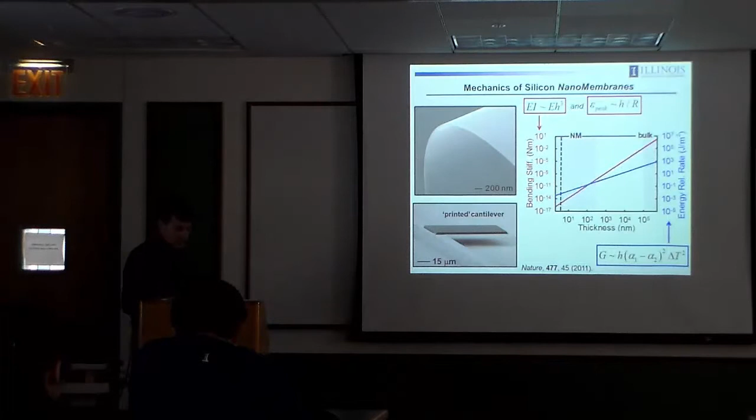So if you think about this format of material, it has the properties that I just mentioned. It's very planar, flat. It's rigid and brittle. If you drop it on the ground, it'll shatter into a million pieces. If you try to wrap it around a body part, it will crack. And that's partly because of the intrinsic materials properties, but it's also a consequence of the fact that the wafers are pretty thick. So maybe a ½ millimeter thick or a millimeter thick, depending on the diameter. And that renders a relatively large bending stiffness.

So the bending stiffness scales like the product of the modulus of the material. That's sort of intrinsic. You're not going to change that. But it also depends on the cube of the thickness. So if you plot the bending stiffness as a function of thickness, you see that you have a value for silicon that's around 10 Newton meters for a wafer scale thickness, so maybe a millimeter.

But because of that cubic scaling, this is sort of a log-log plot, the bending stiffness decreases by many orders of magnitude as you reduce the thickness from a millimeter to, say, 10 or 100 nanometers. And so in this regime, the bending stiffness is maybe 10 femtonewton meters, and that's 15 orders of magnitude decrease in bending stiffness just through geometry control. And this is just linear elastic Newtonian mechanics, but that huge 15 order of magnitude change in bending stiffness has a qualitative impact on the way you think about the material.

So it's no longer a rigid plate, but it's a thin floppy noodle. And you can see it here. This is a 20 nanometer thick sheet of monocrystalline silicon. So that's sort of interesting. The other consequence of small thickness is that for a given bend radius, the peak strains induced in the material scale down linearly with thickness. So R is the radius of curvature, H is the thickness again.

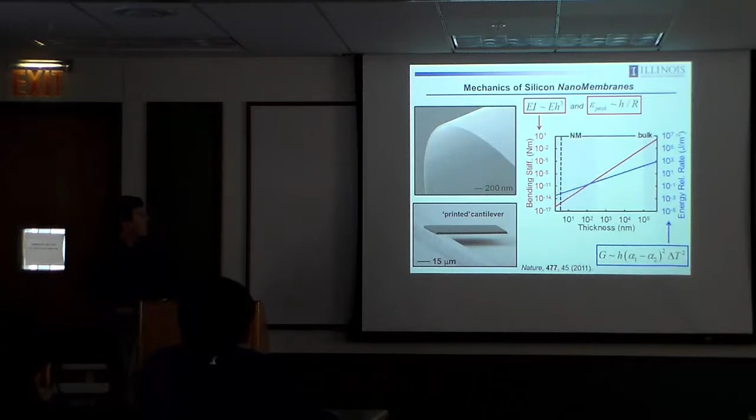So if you look at a plate of silicon, for example, very thin, you can print it onto a micromachined ridge on a piece of plastic, and it will remain in this cantilevered state just due to van der Waals interactions. It's partly due to this linear downscaling of the energy release rate that you can do something like that. So, very flexible, floppy, and sticky is what happens when you make things very thin.

So then the next question, if those kind of mechanics are appealing, again, for doing biointegration, how do you create those membranes in the first place? And one strategy might be to say, okay, I'm going to develop some synthetic techniques to grow those materials from, let's say, vapor phase precursors. And you might think about doing that, but again, you'd probably be well served by acknowledging the fact that people already know how to grow these classes of materials in bulk form extremely well, and in supported thin films.

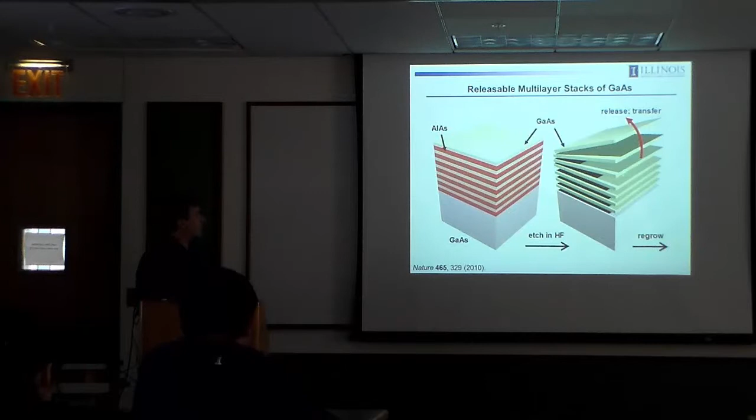So for example, you can create these membranes in this kind of strategy. You do MOCVD growth of gallium arsenide and aluminum arsenide in alternating layers. And that's interesting because when you etch down through this stack, you immerse it in HF, you will selectively eliminate the aluminum arsenide, lifting off the surface of the growth wafer bulk quantities, essentially these gallium arsenide nanomembranes. And then you can reuse the wafer.

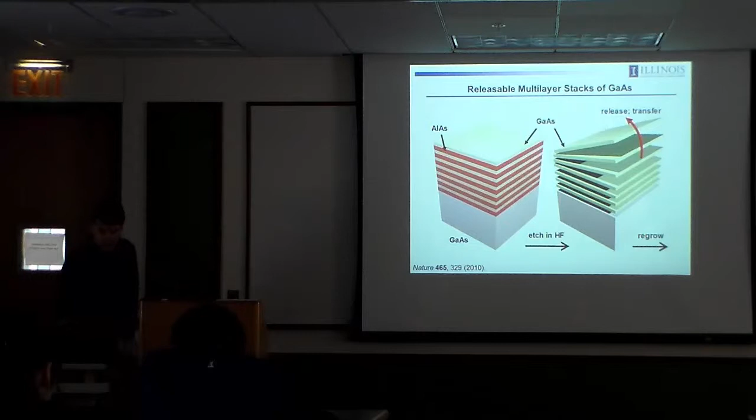So this provides a really easy and powerful route to extremely high quality, very thin sheets of semiconductor materials. And you can do this quite well. We work with Xiuling Li here in electrical engineering. There's the 40-layer stack, gallium arsenide 200 nanometers thick, aluminum arsenide sacrificial interlayers, again, 20 nanometers thick, etch down, eliminate the aluminum arsenide, lift off a lot of gallium arsenide nanomembranes.

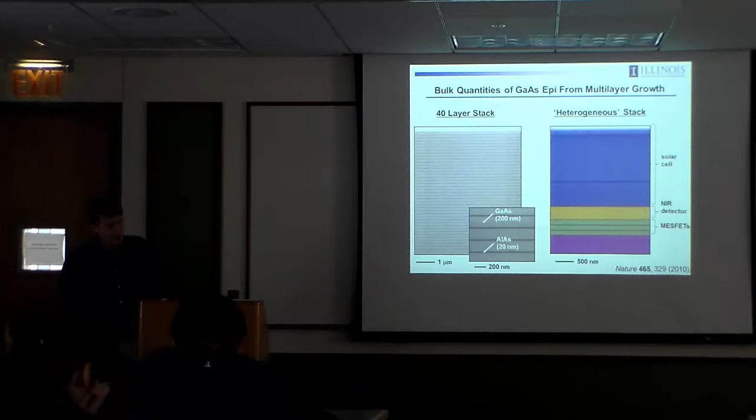And you can do this in heterogeneous stacks also. These are just uniform layers of gallium arsenide. You can change the doping constructs to create solar cells, sacrificially separated from, let's see, near infrared detectors, MESFETs. You can do sort of heterogeneous collections of materials for different classes of devices the same way. And this is what it looks like if you lift it off and then deposit it down onto filter paper.

So you can do this in large quantities in strategies that are fully aligned with mainstream industrial approaches for growing materials and implementing them in devices. So that's mechanics, that's materials. The next question is manufacturing. How do you move these things around and get them into arrayed configurations such that you can establish electrical interconnects and build systems that make sense?

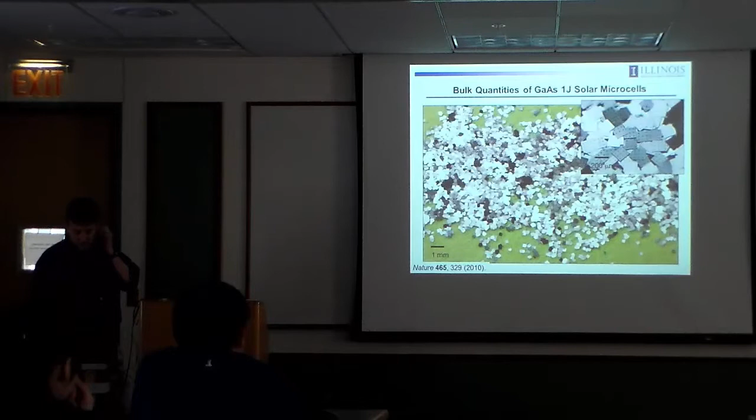This is not a good starting point for that because you have to sort of disentangle all these things, move them around. You can't do it very easily because they're very, very thin, fragile, and very small. So how you do that becomes another topic of research. This is a way that has worked well for us. So you can take these wafers, you create these little platelets, undercut etch them so they're completely released from the underlying wafer except at strategic anchor points. So maybe at their corners you define pieces of photoresist so it keeps them in their lithographically defined locations.

If you do that, then you can think about the wafer as an inking pad for a stamping process, a printing process. Use a soft elastomer stamp with relief features on its surface, bring it into contact; the tacky surface of the stamp adheres sufficiently strongly to these released nanomembranes that when you peel them back, you fracture the anchors, ink up the stamp, index the stamp over to a target substrate, bring it down, print them, and then do this over and over again.

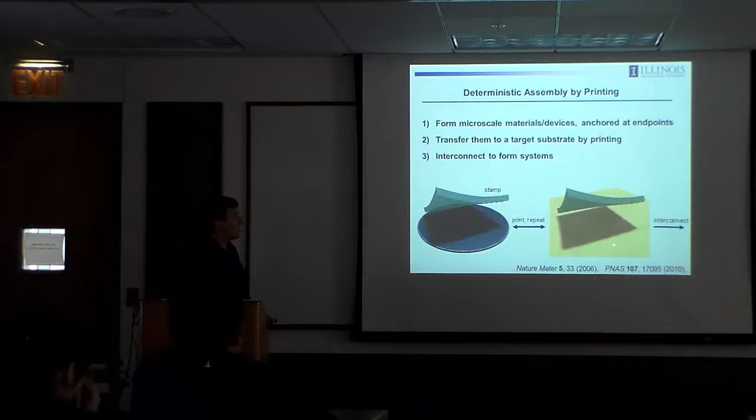So you can take a very dense collection of very tiny, very thin material elements and then spread them out wherever you want them on any kind of substrate. And because you're doing this at room temperature, you have a lot of choices on substrate because you don't need to accommodate the growth conditions that are needed to form the materials to begin with.

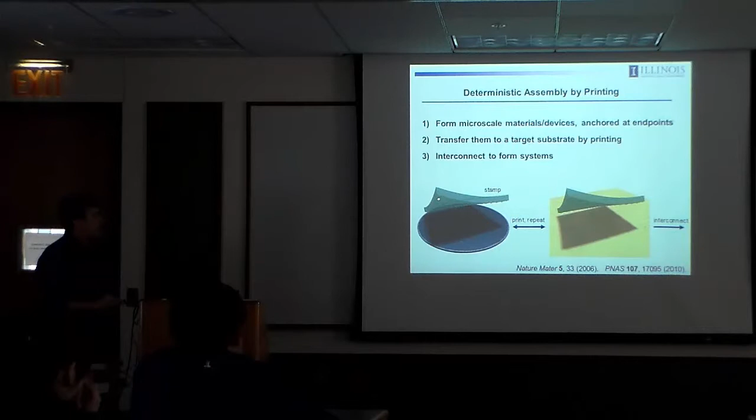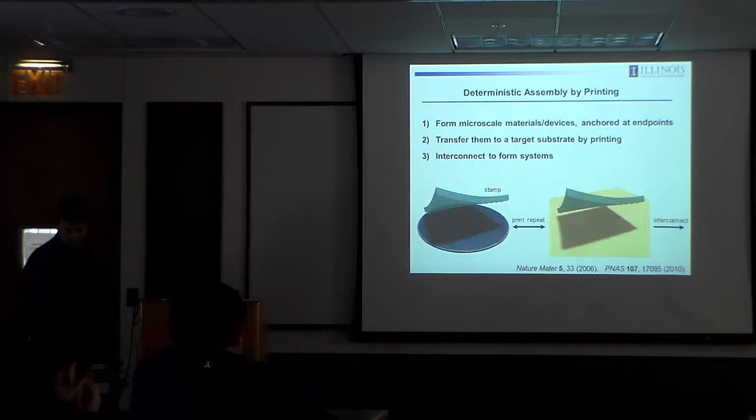And so there are a lot of fundamental aspects around how you control adhesion between the stamps and these elements, because you need to be strong enough to allow efficient inking, but you need to allow them to get off the stamp so you can print them down. So it really requires switchable adhesion strength on the surface of a soft material. There are a lot of ways to do that. I won't get into them now, but just say that can work. You can build tools like that to do it in an automated way.

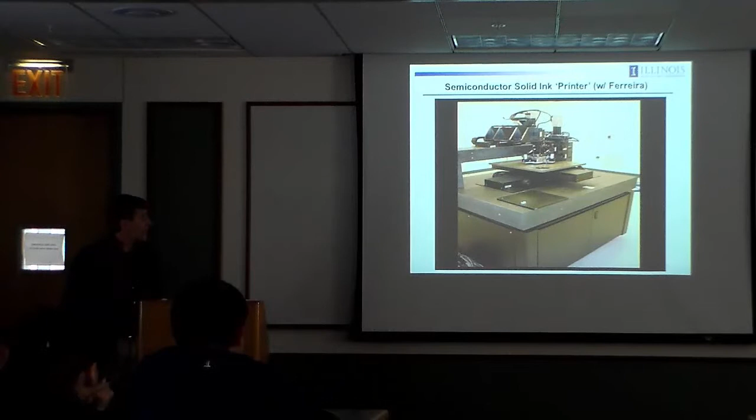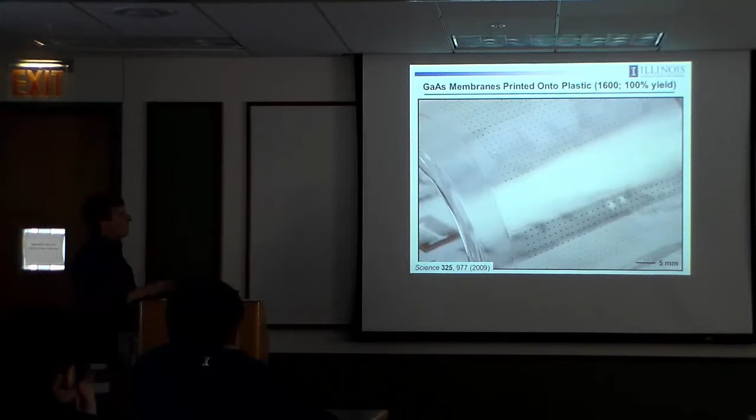So here's an example. Automatic printing of gallium arsenide membranes in a low areal configuration on a sheet of plastic that we subsequently wrapped around a cylindrical glass support. In this case, it's 1600, 100% yield. You see the bending and the adhesion mechanics that I mentioned to you before. Gallium arsenide is extremely fragile, but it's very thin. You're on a thin substrate, so you can bend it without cracking these things. And furthermore, it's a sticky interface, so these elements don't just pop off as soon as you bend the substrate.

So all those things come into play and allow you to do that kind of thing. Okay? So if you can put semiconductors wherever you want them on any kind of substrate, then you can start playing games with mesh designs, buckling mechanics, unusual materials that allow you to build integrated optoelectronic systems that you can integrate with the surfaces of biological systems, brain, heart, and we've done a lot in skin.

And this allows you to do levels of fidelity and precision in, let's say, surface potential mapping, both in the brain and in the heart that would otherwise be impossible if you were just using sort of bulk electrodes without active multiplexing or local amplification. So you can bring the full power of wafer-based optoelectronics to bear on an organ system like the brain or the heart.

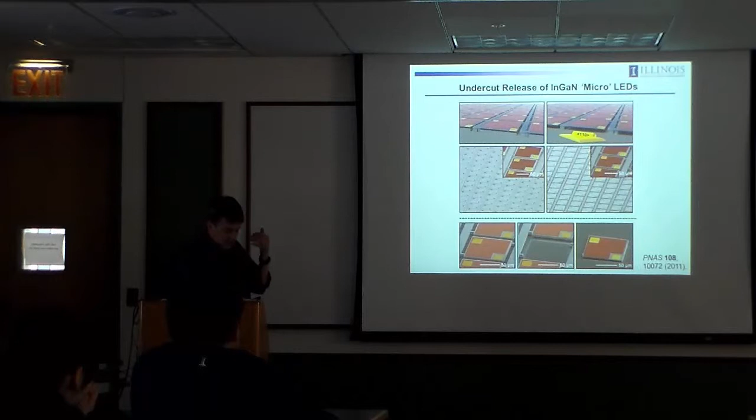But these are 3D organs, so you can only do so much on the surface. Like you might want to have access to the depth, and that's a much harder problem, but one that can be addressed with some of the ideas that I have talked to you about so far. And I'll focus the rest of my talk on that topic, plus the fabrication and use of very, very tiny, thin LEDs. And you see one of them right there, emitting in the blue, this indium gallium nitride. Let me tell you some more of the details about how you make those devices, and then I'll show you how you implant them down into the brain.

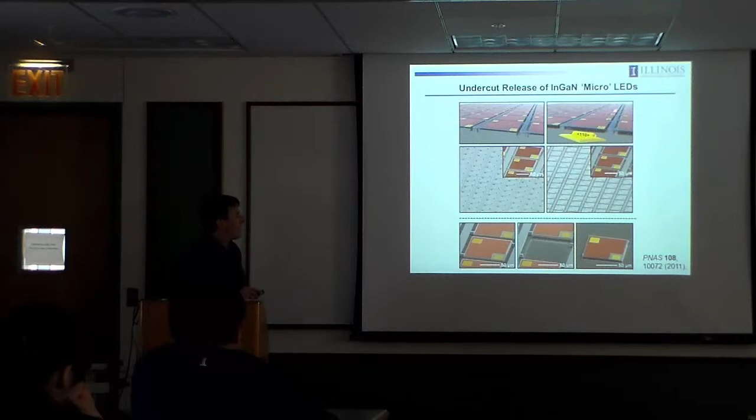So in this case, instead of using aluminum arsenide as a sacrificial release layer, what we do is we grow indium gallium nitride on a silicon wafer that has a (111) orientation. You can do that. You can create high quality InGaN that way. And then the silicon wafer with that orientation has the appealing property that it etches anisotropically in a solution bath of potassium hydroxide. In particular, the etching rate along this crystallographic direction is about 500 times faster than it is along that direction or down into the depth.

And so if you orient your devices that you create in the InGaN material grown on this wafer in this fashion, such that you have anchor bars running along this direction and this direction, then when you etch down to delineate the lateral dimensions of the devices, you expose a little bit of the silicon, you immerse that in potassium hydroxide, and then you undercut just along this direction.

And so the devices then can be configured with little anchor points at the corners, and those provide tethers to these bars such that when these devices are completely undercut etched, they're sitting in a freely suspended configuration and they're ready for printing. So here's one of these devices, little anchor bars, come in with a stamp, pluck that off, fracture the bars, and then you can print the devices down wherever you want.

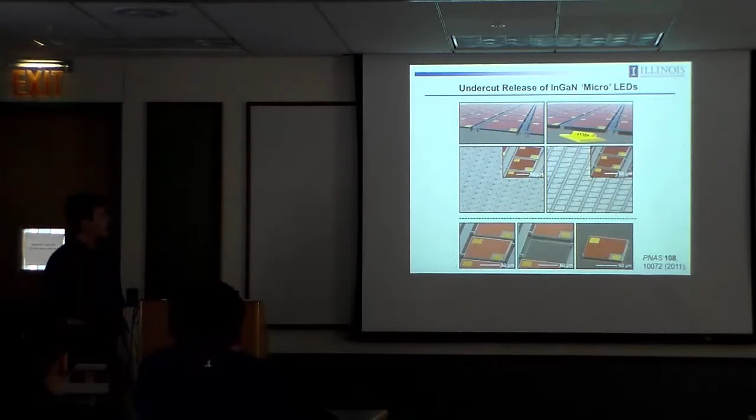So this allows you to make devices that are exceptionally small or big, whatever you want. It's lithographically defined dimensions, so you can go from sort of a conventional LED size in terms of lateral dimensions, 1 by 1 millimeters. The thickness is only about 5 microns, and that's about a factor of 20 to 50 times thinner than a conventional device, because the way conventional devices are built is to use a wafer saw. So you slice up the wafer, so you carry the active material, but you retain that silicon wafer substrate, so much, much thicker. But you can do large or all the way down to small.

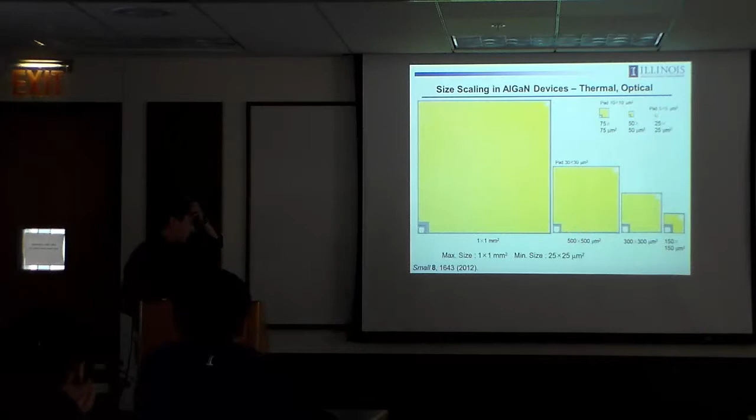So this is about as small as we can do with the academic facility, but in principle you can go much, much smaller than this if you want. It's about 25 microns on a side. If you have better lithography capabilities, you can go smaller.

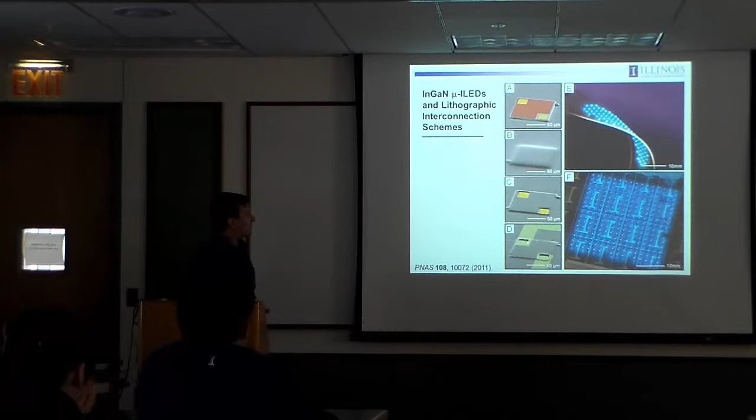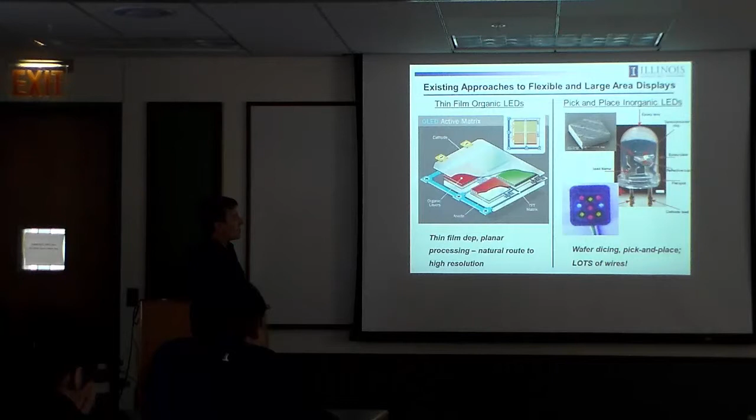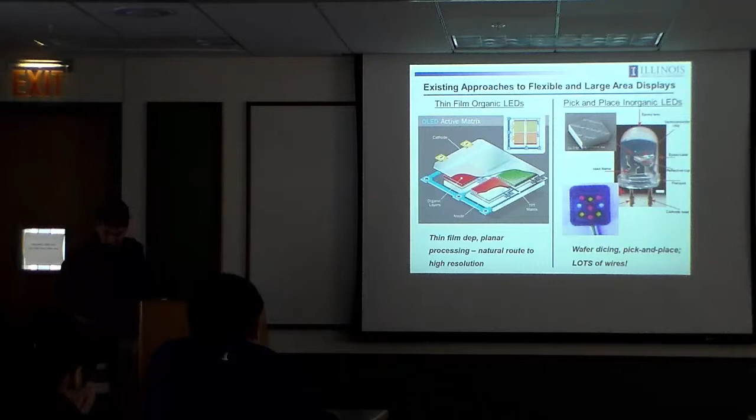So the upshot is that this kind of inorganic LED technology begins to look a lot like organic LEDs in the sense that they're very thin, they're compatible with planar processing, and you can develop large-scale arrays of them on a planar substrate. And that's a lot different than what you can do with LEDs today, where you dice up the wafer, you end up with these big chunky blocks, and then you move those around with a robot, you put them in cans, and then you do wire bonding to form pairs of terminals to each individual device, and then you take those things and you tile them up and you make giant macro scale displays, but in a way that does not downscale in size or upscale in number of pixel elements very easily.

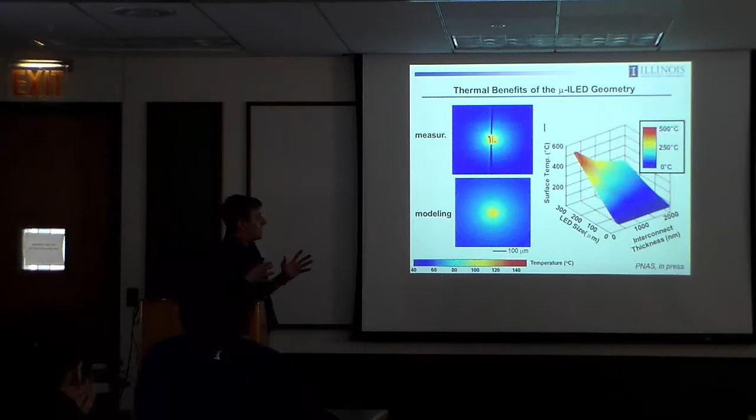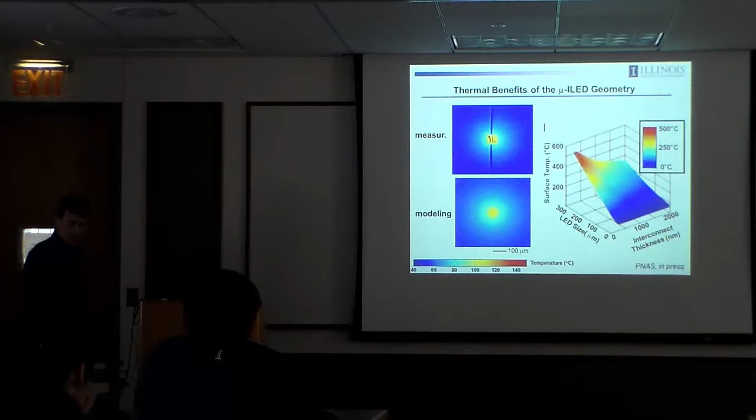The other advantage, I'll come back to this in a second, of very tiny small LEDs is the ability to do passive thermal management. So because the surface area to volume ratio is very high, the passive rates of cooling are very high, number one. And then number two, the electrical interconnects themselves have sufficient thermal mass that they suck heat away from the devices themselves. And so if you compute surface temperature as a function of LED size or interconnect thickness, you can see the tremendous benefits in going down in size and up in interconnect thickness. You can operate these devices at very, very low operating temperatures using those two concepts. And that's extremely important for integrating LEDs with biology, because you have a very narrow thermal budget in the context of living cells.

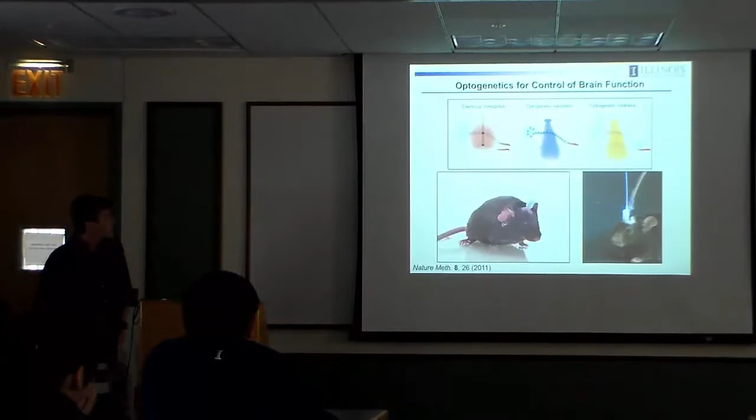But I'll just focus on optogenetics, which, as you may know, is a very powerful and fairly recently developed technique in neuroscience in which you use genetic modification to create channel rhodopsin in the membranes of specific neurons. And if you do that in the right way, then you create some optical sensitivity to their function, so you can optically excite or inhibit their activity. And that's important because it provides a much higher level of precision than what you can do with electrical stimulation, which is not cell specific. And so this is creating huge opportunities in doing new neuroscience studies, behavioral studies, and understanding how brain structure and function controls behaviors. And that's pretty exciting.

But everything that's being done right now is driven by neuroscientists who aren't very good with materials and engineering. And so this is the kind of thing that has dominated the field. In fact, the only platform that's really been used for any substantial work in this area. It involves an optical fiber that's implanted down into the brain on one end, and then the other end connects to what is not visible in this image, a separate box that's providing the light source, typically laser. And you have some dental cement and a fixture here. So in this way, you can certainly introduce light down into the brain.

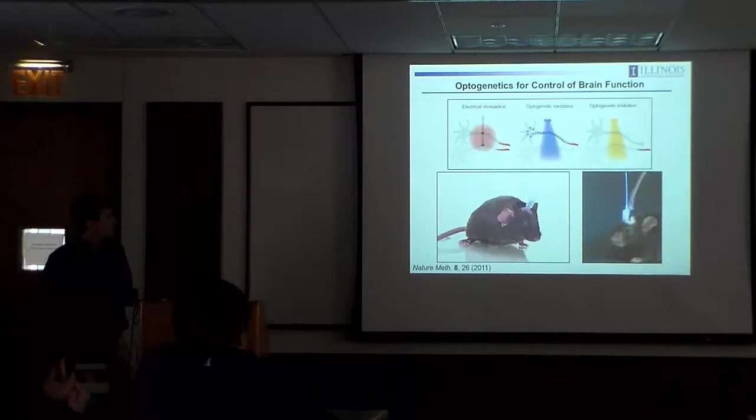But if you're trying to study behavior, you have to wonder about what this tether is doing in terms of restricting that natural behavior. And then furthermore, you can't really allow the animal to explore a very complex environment because they get tangled up with the fiber optics. And likewise, social interactions become very difficult because everybody's tethered and getting tangled with one another. So that's the landscape that we observed when we got involved in this in late 2011.

And our idea was to say, throw out the laser, throw out the fiber optic cable, and put active LEDs down into the brain and use wireless control and harvesting strategies to enable really free moving animals to be modulated by optogenetics. So use the ideas I just described to you. Very tiny LEDs, almost cellular scale in their dimensions compared to fiber optic. This is kind of what it looks like. And then mount them on ultra thin filaments of polymer. So narrow strips, very thin polymer substrates, do the transfer printing, do the edge over metallization and interconnect, and form little arrays of LEDs such that the entire polymer filament here is only maybe 5-6 microns thick.

And that tiny thickness, smaller than the dimensions of an individual cell, allows you to do not only LEDs, but you can stack up other devices on top or beneath these LEDs to create multifunctional systems. So you can do LEDs, you can do photodetectors, little thin silicon pin diodes. You can do electrodes for measuring or stimulating electrically. You can do heaters or temperature gauges down here. So thermal management is very important, as I'll highlight in a few minutes.

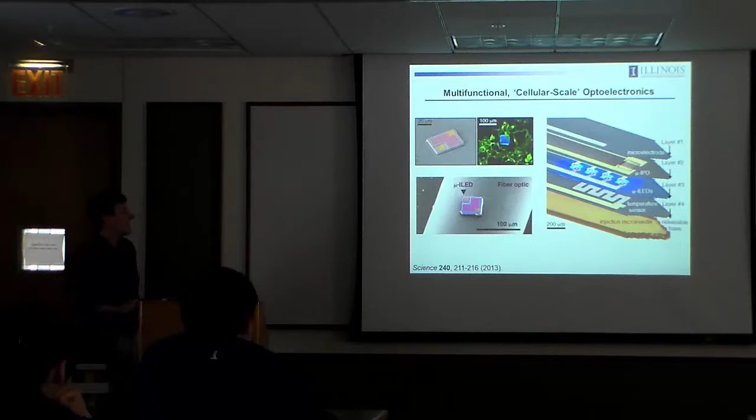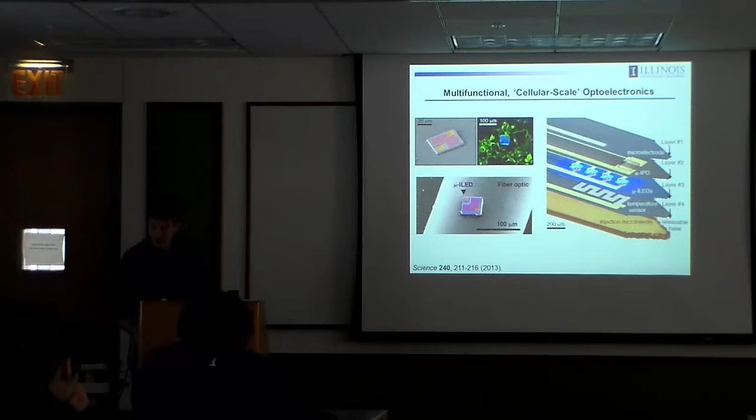And so stack these things up. And at the end of the day, you're maybe at 25 microns. And that's good in the sense that it involves minimal displacement of tissue during injection. But what it means is because of the bending stiffness scaling with the cube of the thickness, it doesn't have enough rigidity to actually penetrate the brain tissue. So what we do is we use a releasable thin microneedle that's much thicker, lithographically defined in a polymer to match the shape of these devices, and then adhered to it with a bioresorbable glue. So you inject the whole thing down and then you release the devices by taking the needle out.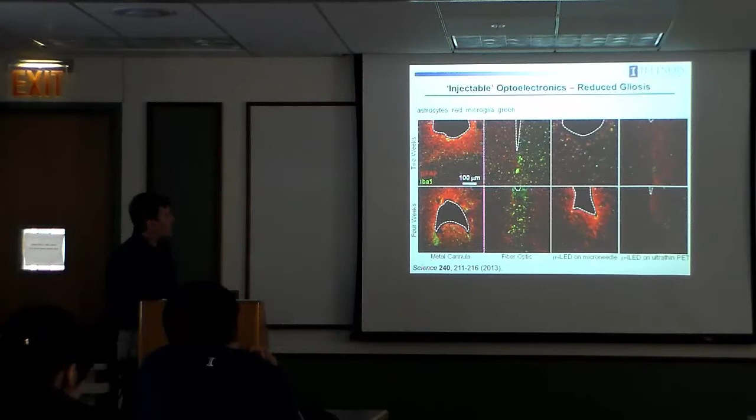So the very small geometries of these devices greatly minimize gliosis and other kinds of unwanted biological responses. So you can compare metal cannulas, obviously the worst. This is the fiber optic cable here. This is the LED with that releasable microneedle injection system still in place, and this is what it looks like when you pull it out. So compared to all of these reference points, the ultra thin multifunction LED system is providing the least invasive type of implant.

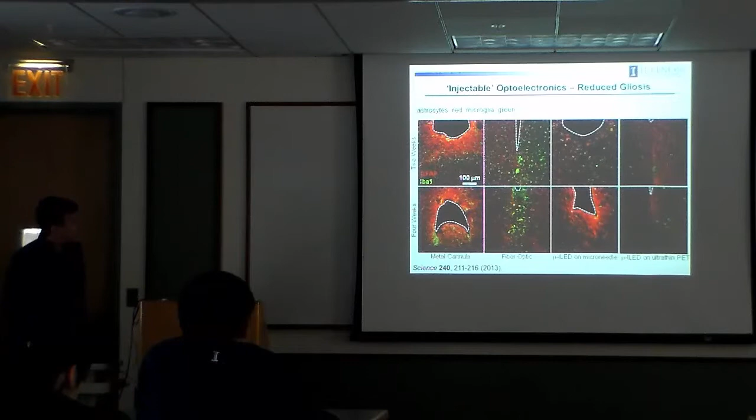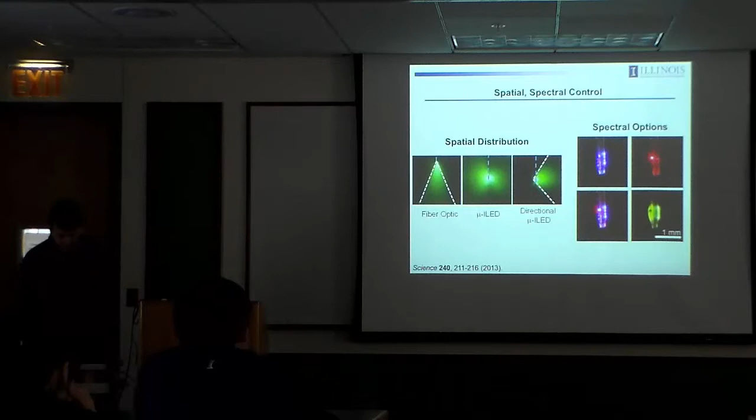It also provides other opportunities in controlling the directionality of the light. So if you have a fiber optic, you just have a cone of light coming out the tip end. But with the LEDs, you actually get light emerging from the sides, or you could get it down to the end. And you can put reflectors, for example, to control where it's going, one side or the other. You can also do multi-colors. So I showed you blue, you can do red. You can do red and blue. You can do green. Pretty much whatever you want and need in terms of your optogenetic sensitivity.

So the devices are now in the brain, and you think about it as like a light bulb in the brain. That could be a good thing, could be a bad thing. You have to recognize that the brain can't tolerate temperature changes more than a couple of degrees before bad things start to happen. And if you think about that in the context of an LED flashlight or headlamps, you quickly realize that thermal management is going to be an interesting thing to think deeply about. And we spent a lot of time around thermal management. And you can do a number of different studies.

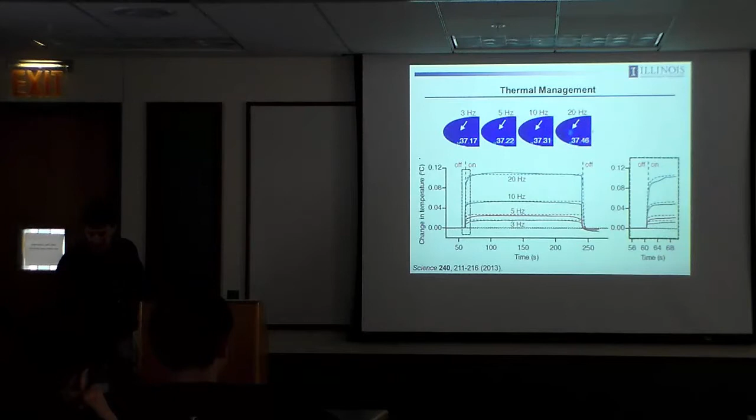That's extremely helpful. And then the other thing is in the living system particularly, and you can see the delta T in the living system is much smaller than that in this explanted brain sample. And that's because the blood flow, the circulation through the vasculature next to the LED, is actually a heat sink. So it's pulling heat away from the devices. So even at the highest repetition rate, the peak temperatures are less than or about comparable to about 1/10 of a degree. So that's more than a factor of 10 smaller than it needs to be in order to avoid adverse effects of the heating.

So this allows us to deliver power to the LEDs, and then by simple extension allows us to turn the LEDs on and off using a patch antenna that we put in a corner of the room that has the cages for the animals. So we can do one or many animals, and we've removed entirely any kind of tether. So this is what it looks like.

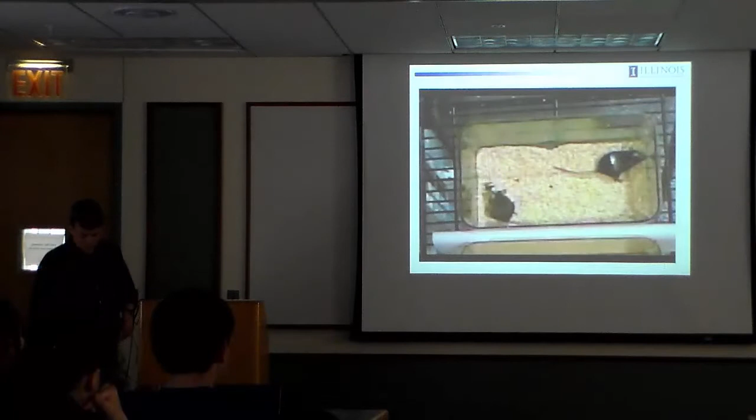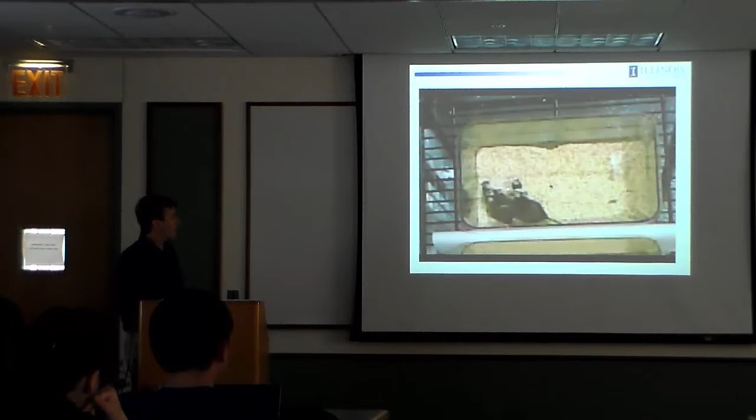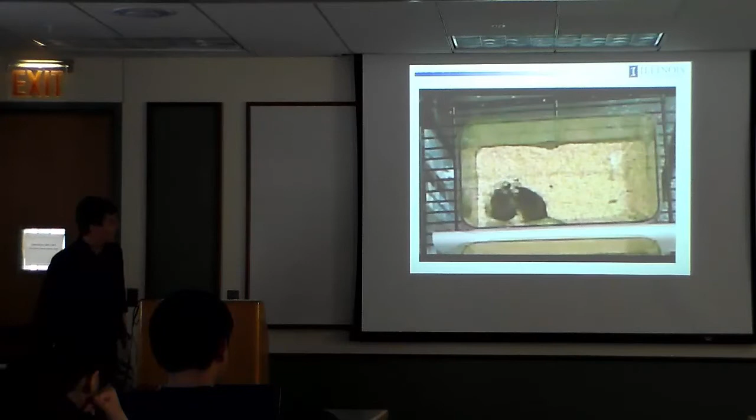So these are the animals. This is the power harvesting module on the outside. It's a little bit bulky. I'll show you much smaller ones in a second, but we are unable to see any measurable difference in activity levels of mice that have these devices and those that don't. So it doesn't seem to affect their behaviors to the extent that we can measure that.

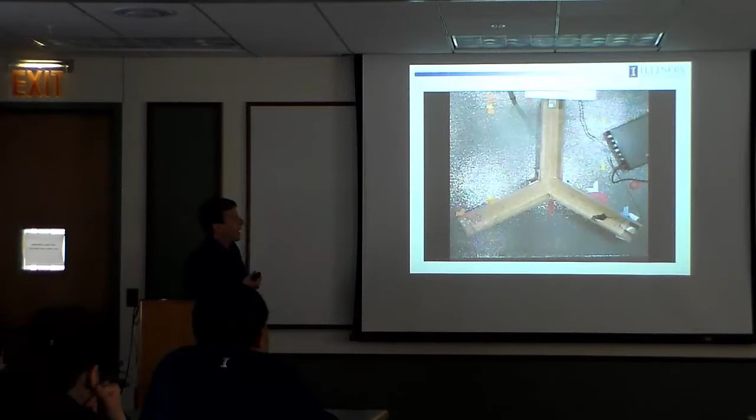Here's a simple optogenetics experiment to illustrate that the devices are working. So in this case, the mouse is genetically modified to allow us to stimulate neural circuits that produce dopamine upon light exposure. And the dopamine creates a pleasure response in the animal, and we can use that pleasure response then to train complex behaviors without physical reward.

So what we're doing here is allowing the mouse to explore this Y maze habitat, and whenever the mouse comes into this region of the Y maze, we illuminate the brain, activate the RF antenna, light up the LEDs. That creates dopamine, and it creates an affinity in the animal for this part of his world. And so if you do that enough times, then the animal doesn't want to go anywhere else. It's just hanging out right there all the time.

And this is just a simple demonstration that the technology works. This kind of optogenetics study has been done in the past with fiber optic cables because you can do that. It's a very simple environment. It's not a social experiment. But this is a good starting point for us to illustrate that the device works.

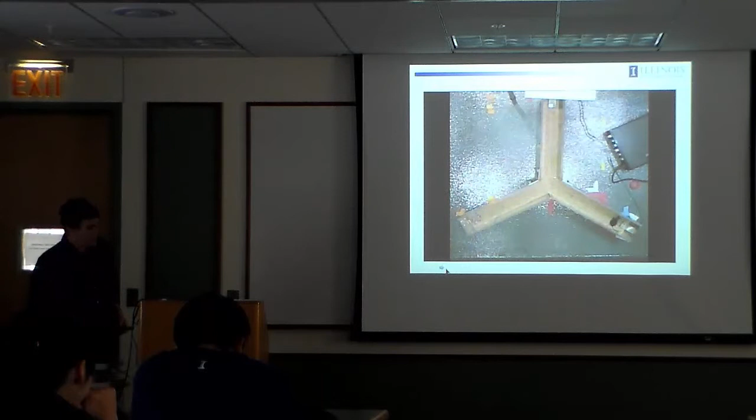So here's what it looks like when you do those kinds of experiments. If you do not train the animal, they like the ends of these corridors, but they like each one with equal affinity. But if you do the training, then even when you're not operating the LEDs, they stay in that part of the maze. So that works.

So what are we doing now? We're doing two things: working on advanced technology, and then working with our collaborators to use the existing technology to do more advanced optogenetic studies than had been previously possible. So we supply devices now to probably a dozen groups who are interested in their use. We have many more folks who would like devices, but that's maxing out our bandwidth just building these things. So we're doing a lot in that domain.

I won't talk to you about any of that, as some of it's still ongoing. But I'll tell you a few things about the technology advancements. So there we're focused on two capabilities: really reducing significantly the size of the harvester to the point that we can actually implant the harvester subdermally. We're doing that. The other thing we're doing is we're creating additional functionality in the injected needle structure.

So we now have devices that allow you to inject not only light but fluids. So you can do drug delivery, and you can also do extraction of interstitial fluids. I won't tell you anything about that. Those devices are working, and we have animal model results, but I didn't have time to make the slides. I'll show you just about the harvester.

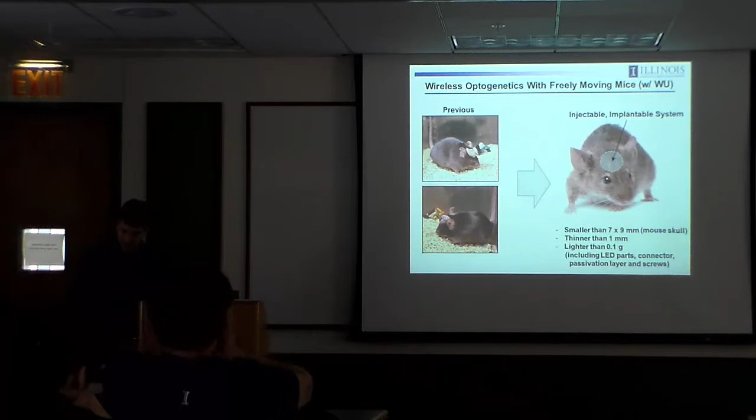So this particular device was designed for operation at 900 megahertz. One simple way to reduce the size is just to go from 900 to 2.5 gigahertz. And immediately everything scales down because of the shorter wavelength in that regime and allows us to get the whole device now under the skin. So it's about a factor of 60 smaller in dimensions, about a factor of 20 reduced in weight. And so at this point it's just a tiny fraction of the weight of the animal itself, about 1,000 times smaller than the weight of the animal.

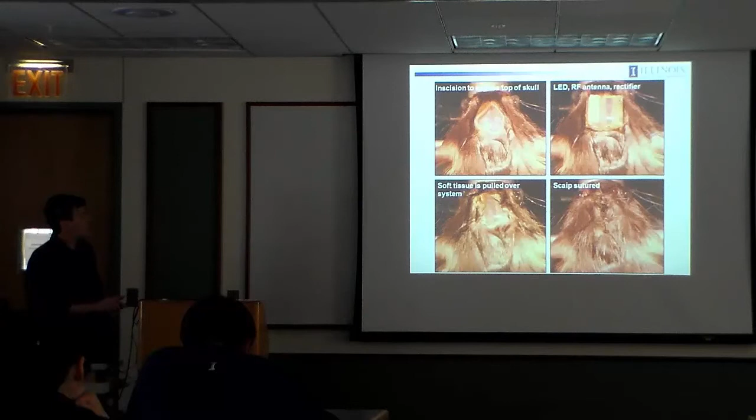So this is what it looks like then when you do that. So you open up the intracranial space, you inject the devices, and then the harvester looks like this. So we encapsulate it in a thin layer of silicone, essentially, to prevent ingress of body fluids, and then it's small enough to go under the skin, and then we can suture it up when done like that. And because the antenna is close enough to the surface of the skin, losses associated with absorption into biofluids are manageable. So we can get RF radiation through the skin without much problem.

So this is one of the first animals that we implanted with these devices. So the LEDs are down into the brain. LEDs terminate at a harvester, which is sitting right here. And this is a gel placed on top of the wound to avoid infection. So now we can do things like this. And in fact, you can now take these kinds of devices and use them in optogenetic studies of other parts of the nervous system. And in particular, you can use optogenetics to modulate pain response by stimulating or inhibiting activity of the sciatic nerve. So you can take these devices, you can put them in the hind leg, and we're doing that kind of work as well.

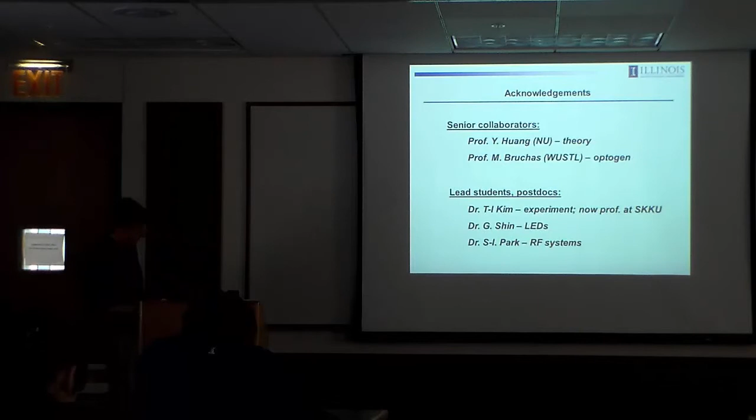So that's really all I had to say. The work itself relies on close collaborations with senior PIs at Northwestern on thermal modeling and theory around that. Michael Bruchas is our collaborator in optogenetics for studies of the brain, and we work with Bob Gereau, also at Washington University, on these studies of pain modulation. The students, 3 very good postdocs, Taeil Kim, who's now a professor at SKKU, Gunchul Shin, still here building the LEDs, and Sung-Il Park from Stanford is focused on the RF system.

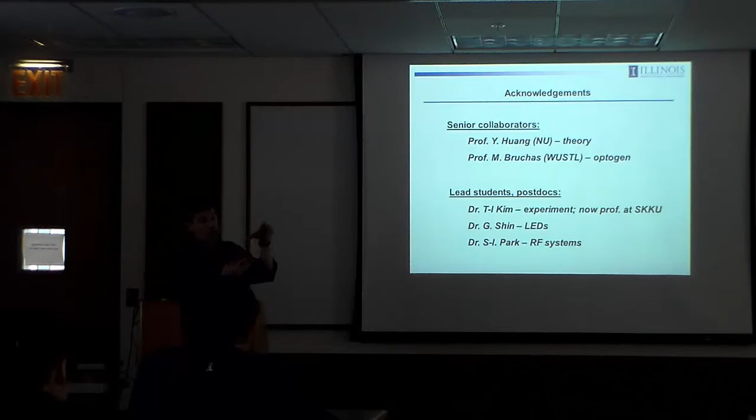Yeah, so we have had these devices implanted in animals for as long as a year. We haven't seen anything over that time frame. But we're not aiming for 10 or 20 years. I mean, that could be a relevant target to think about in the context of deep brain stimulation or things you might want to do with humans outside of optogenetics, just using the injectable electronics platform to do some things along those lines. I think those are interesting directions, but we really haven't pushed the studies to that degree. So for this work, it doesn't seem to be a problem. Yeah.

Yeah. So you have the device that can do stimulation. Do you think there's a potential to do also imaging, so you can monitor? Yeah, so we have an NIH program not to do full imaging. I think that would be the ultimate thing. We're working with Steve and trying to think about how that might happen. But in the meantime, we have a separate program with folks at NIH that's designed to allow fluorescent measurement of overall brain activity in the vicinity of the region that you're doing optogenetic stimulation.

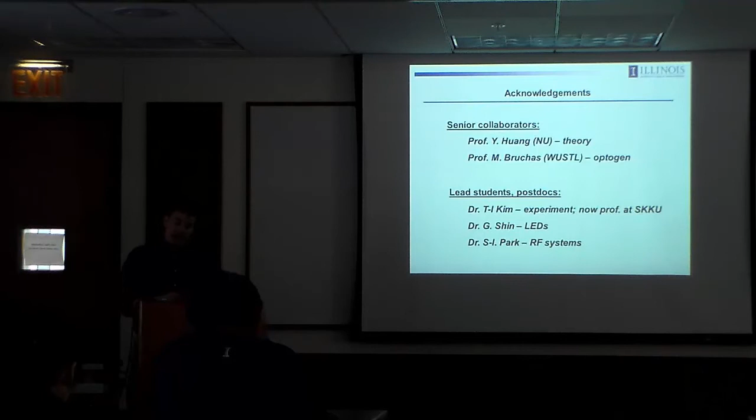So we have, in that case, LED to do the optogenetic stimulation. Then we have another LED color to stimulate the fluorescence, and then we have a narrow band optical detector. So it's not imaging, it's like single point measurement. But I think maybe that's a step in that direction. I mean, it would be awesome if you could do full imaging, but you have bandwidth on the communications back out. It's quite a bit beyond what we've done so far. And I think just the global fluorescence measurement is a good first step to think about something more ambitious.